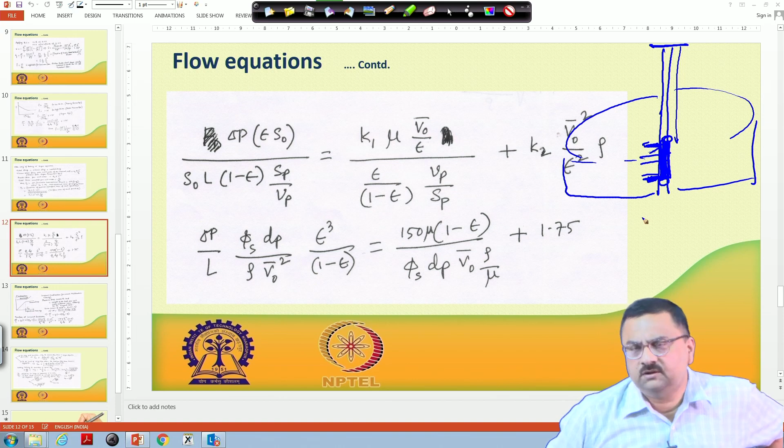So, if at all you go for a 3D simulation, that is for some other purpose. That purpose would be you have a permeability variation in z direction. I don't think this could be a very major reason for which you go for 3-dimensional one, and you must appreciate the simplicity that you have brought in by considering the 2-dimensional flow. In 3-dimensional flow you have to completely rely on a numerical simulation, whereas for 2-dimensional flow a lot of analytical solutions were generated, and you can visualize them by looking at those expressions. So, that you must take into account.

Okay. The other question that you have is, I have a question regarding Taylor series. Why does the expansion happen over length and how? Which Taylor series expansion you are referring, and which lecture? That has to be understood. First of all, I do not understand which equation you are referring, where we did this Taylor series expansion, but if at all it is done over length, that means we must be doing it for a differential element.

We constructed a differential volume of dimensions delta x, delta y, delta z, and since delta x is small, let us say I'm looking at the variation of pressure within this differential volume. Then pressure would change from the left face of this differential volume to the right face. So instead of treating the pressure as it is, we can linearize within this distance. Within this volume, we can assume that the pressure in the x-axis.

See this. There is a question on how this Dirac function is applicable in case of a miscible displacement. What that means is, for a miscible displacement we are looking at a spot of dye placed in an infinite medium. So this is the infinite medium. Let us say this is the axis.

This is the axis, so this is z. This is tending to plus infinity and this is tending to minus infinity. So the Dirac function is basically, at the initial state, you are putting a spot of color in an infinite medium. So at t equal to 0 the concentration of color is 0 everywhere, and the concentration of color is infinity at z equal to 0, and again it is 0 everywhere when z is not equal to 0.

So this is a classical Dirac function, and this simulates a spot of dye in an infinite medium, spot of tracer, spot of color in infinite medium. And the idea is that as time progresses there would be a build-up of concentration in the surrounding medium and a reduction in concentration at z equal to 0.

So at time t equal to 0 the entire solute, which is m gram of solute, is condensed within a 0 volume at z equal to 0. That is why the concentration has become infinite at that time, and as time progresses that m amount of solute gradually occupies the entire medium. So that is something which we are trying to solve.

In this course, we are talking about two types of tracer tests. One is where you give this Dirac function, that means you give a short pulse, or you can give a step change and see how that step change travels. Now, if you are doing a step change in a large reservoir, that would require a lot of tracer, because initially it was zero concentration and then you continue to inject tracer for some time.

So always you would be going for a pulse. That would be easier. You are having water injection, so instead of water injection, for a short time you give a pulse of a tracer. Then you try to see when that pulse appears at the production end, and how much that pulse is broadened. Even at reservoir scale, or in a core flooding experiment, you can give a pulse and see how much it is getting broadened, and from there you will get an idea of the dispersion coefficient.

If you have a large dispersion coefficient, or how your dispersion coefficient compares with the bulk diffusivity, from there you can get some feel whether the porous medium is homogeneous or highly heterogeneous. So that is applicable at reservoir scale as well as in the core flooding experiment. In fact, these tracer tests are a very important tool for oil and gas reservoir applications.

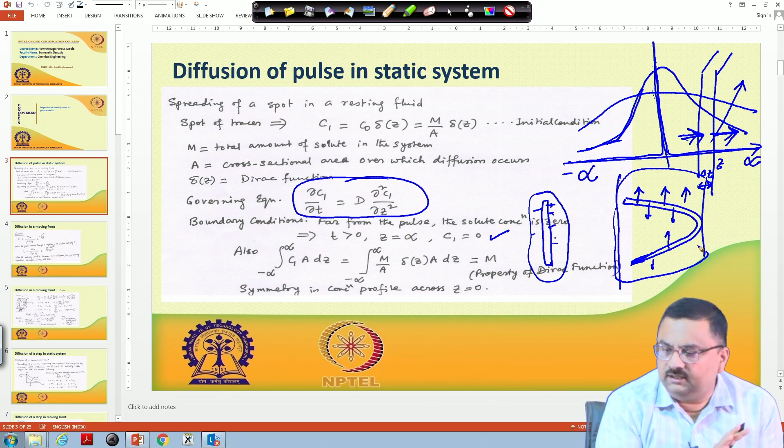Now, your question is about the formula where the concentration is written as C1 bar, in the Taylor dispersion formula. Okay, I will get to that in a moment. Let me complete this exercise. What was the earlier question? Dispersion coefficient decreases if diffusion coefficient increases.

So let us say you start stretching this parabola. As it travels further, it stretches down the line. If your diffusion is slow, then truly you can stretch this strip all the way here, and when you collect this entire material at the outlet, you are picking this slice, mixing it in a mixing cup, finding the average concentration, and plotting that concentration.

So after you collect it in the cup, you will get a mixing zone which is this big. This is slow diffusion: you allow this parabola to form with the strip size remaining as it is. Whereas when the diffusion is high, this strip will not remain a strip; because of diffusion it will all mix and form a band. So then you are again coming close to this situation.

So when your strip maintains its form as a strip, it will continue to expand like a parabola, and you are creating a much larger mixing zone. So when diffusion coefficient is less, you have a larger dispersion, because at the end of the day you are collecting it in slices from the sides, and these slices are mixed to get this concentration. So it is as if your mixing is over this entire length.

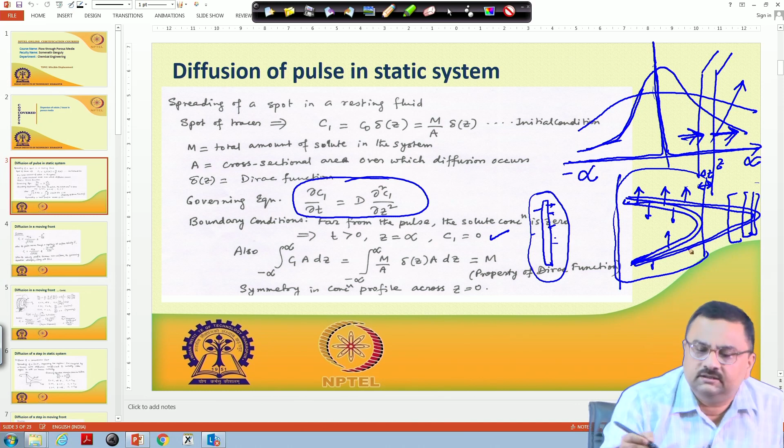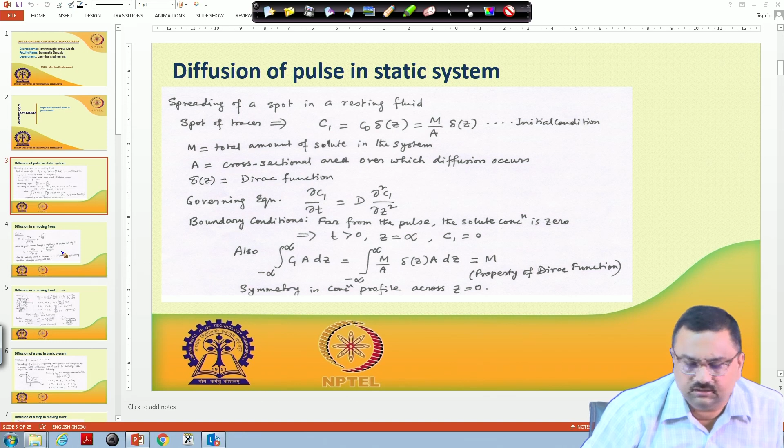And regarding your concentration increasing, let me see. This is the C1 bar. Where did I use C1 bar? This is C1, just simple C1. C1 bar is here. C1 bar is a function of... the concentration decreases. I'm still not quite convinced.

You must understand why the dispersion coefficient relates this way. When you have a solute which has a large diffusion coefficient, what would be the scenario of dispersion? That we need to understand intuitively. And this is what you have as C1 bar; this is the expression. What you mean by C1 bar increasing is not fully clear to me, but this is what I can think of at this time.